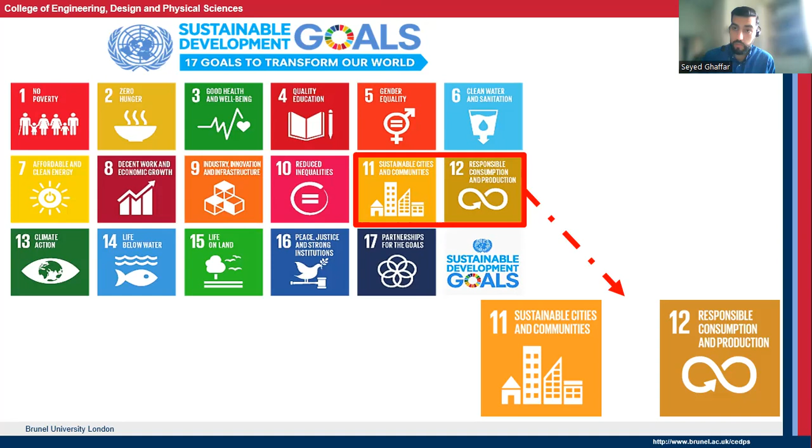These waste materials are produced every year throughout the world. Once the grain is harvested for food production, the rest of the straw stem gets incinerated or burnt on the fields, and this contributes a lot to the CO2 emissions, which is a negative impact on the environment. What we have proposed with this project, we wanted to make a sustainable, high-performing building material instead of burning them or sending these agricultural waste to landfill. So that's exactly in line with sustainable cities and communities and responsible consumption and production of our resources.

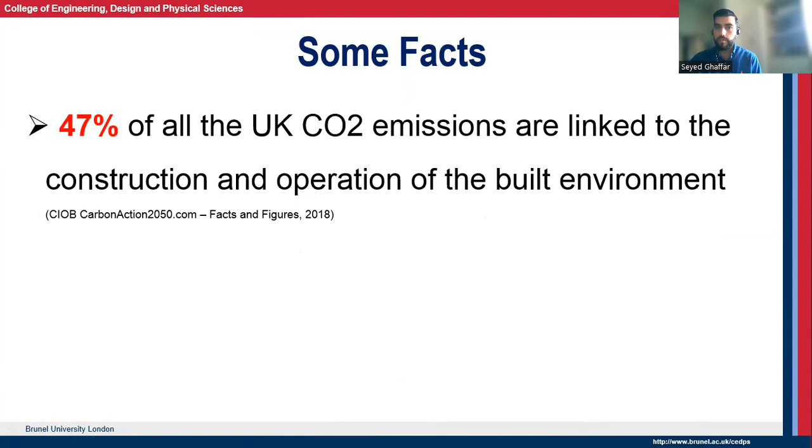I would like to also give you some facts about the construction sector. 47% of all the UK CO2 emissions are linked to construction and operation of the built environment. So this is a huge number, and this is only specific to the United Kingdom, but these figures are more or less similar in all the other big countries around the world, and in some cases they are even higher.

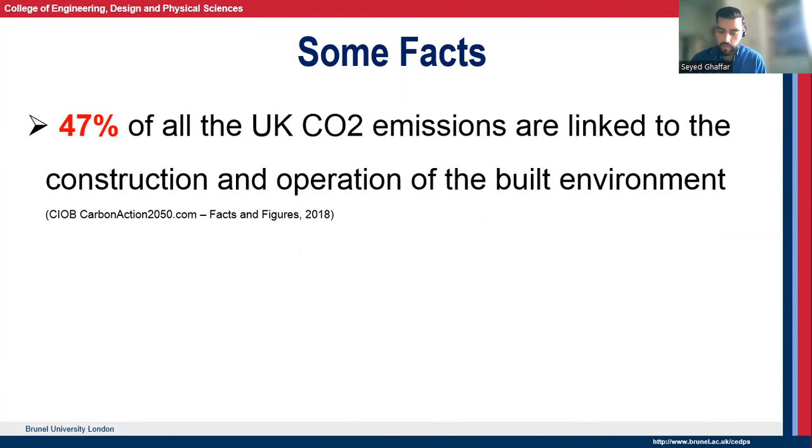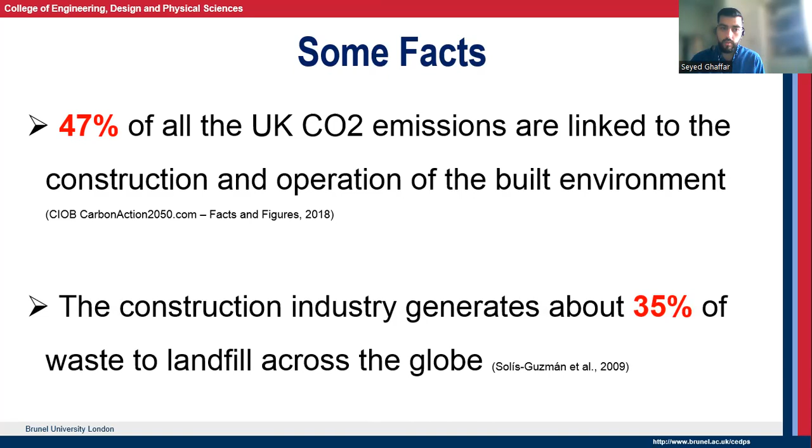Moreover, the construction industry generates about 35% of waste to landfill across the globe. This figure is for 2009, so it's really outdated, but this just gives you some of the motivations that we have had in order to think about this project and try to divert some of this landfill waste and give it some value in order to be able to produce building products using agricultural waste.

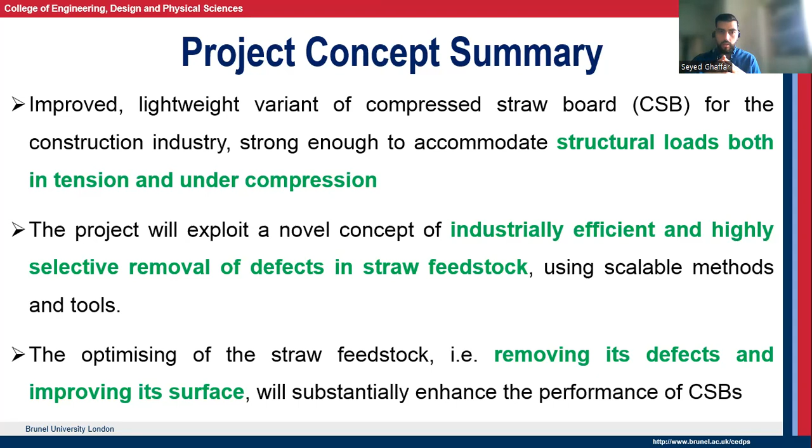And if we focus on these two important points, removing the defects and improving the surface chemistry, we will be able to improve the mechanical performance of compressed straw board, as well as the physical performance, durability, water absorption, and other durability factors, the moisture content and all of that, which are extremely important when it comes to introducing a product to the market.

So this represents the concept diagram of the project, HPCSB, High Performance Compressed Straw Board. It starts from here, so we wanted to focus on modular systems. These compressed straw boards come in a modular form and they just get assembled on site to have a low-rise building, a farmhouse, and other similar projects. We had a partner called SpaceLink Trust. They were giving us these foundations and these wall elements that we could use in order to fit our CSBs.

Main focus was on raw material optimization, defect separation. So you are looking at the raw materials here in this picture, and we wanted to remove all the defects that we find in this straw, wheat straw specifically. And another work package was to integrate the compressed straw board into the SpaceLink system.

We had to focus on the pre-treatment of the material in order to enhance their properties. We wanted to come up with an environmentally friendly manufacturing methodology. So we didn't want to use high energy intensive pre-treatments or chemical agents to optimize and improve the raw materials. We wanted to just use a very mild combination of physical treatments to improve the surface chemistry.

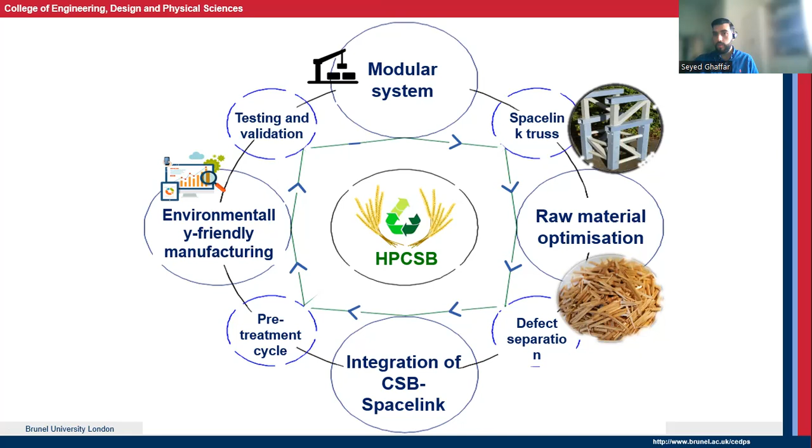And most of the project, of course, in these type of product development projects is about testing and validation of the hypothesis, of the results, and ensuring that they are up to a certain standard to be able to be used in the built environment sector. So it starts all from the coordination and communication. We had two project partners, including myself as a principal investigator.

The project was defined using 4 different work packages, starting from work package 1, raw material characterization and pretreatment, feeding that information into selective processing for optimization of the raw materials, then moving on to the manufacturing process for the development of prototypes. Work package 4 was all about testing, characterization, and impact evaluation. So in terms of the life cycle analysis and life cycle cost, in order to be able to industrially upscale and write an appraisal for upscaling of this process and this project.

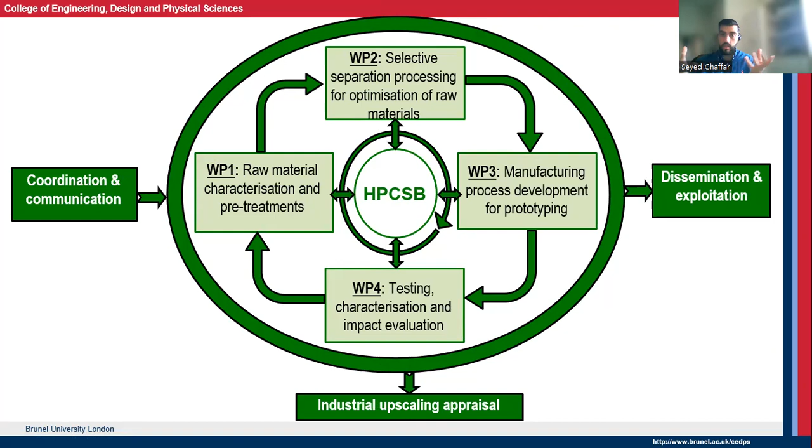So this is the picture showing the raw materials of the straw. This is the anatomy of the wheat straw stem. So these are the grains. Then you have internodes, then you have nodes, which basically act as joints of these columns, let's say, of these internodes, and so on and so forth. So we have these nodes as defects because they are not good in tension. And I will show you their morphology in the next slide. So this was the raw materials that we were dealing with.

And of course, on the surface, we had a lot of wax, a lot of silica, which makes the surface hydrophobic and does not allow any resin to penetrate inside the surface and improve the bonding performance of these raw materials. So we had to remove this silica and these waxes on the surface of straw using an eco-friendly pretreatment.

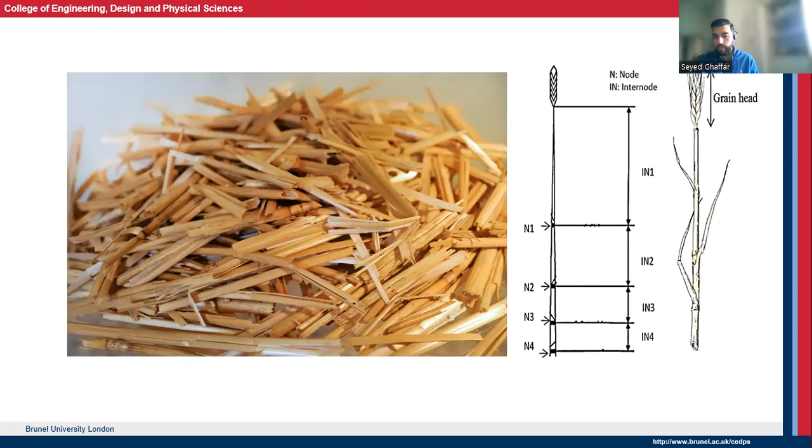So this is the microstructure of the node in the wheat straw as it is cut longitudinally. And you can see how the cross-section looks when you go from the bottom, from the root to the grain head. So you have the cross section at this part, and you can see it changes, it becomes very compact, and then it enters the upper internode. These are some more optical microscopy and scanning electron microscopy images of the node.

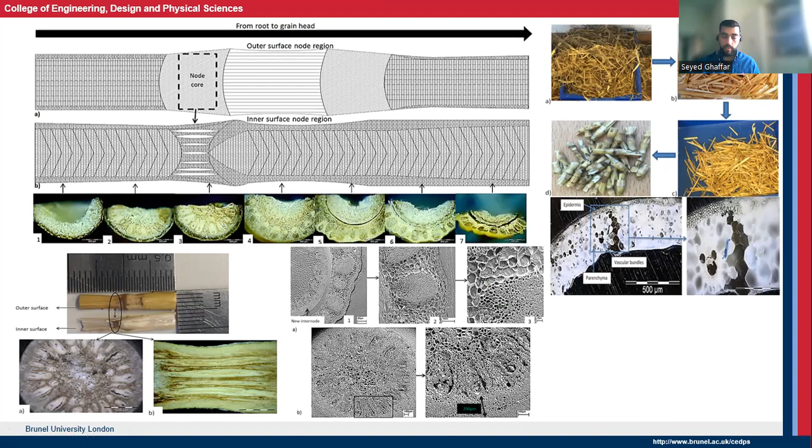So in order to have the valorization pathways, biorefinery, we had to identify which part of the straw is good for which application. So the internode, we focused on pulp production for paper, and then you can make biocomposite out of internode if you compress them together. You can make energy pellets for incineration, anaerobic digestion for the production of biogas. You can then use enzymatic hydrolysis for the production of bioethanol and production of bioplastics.

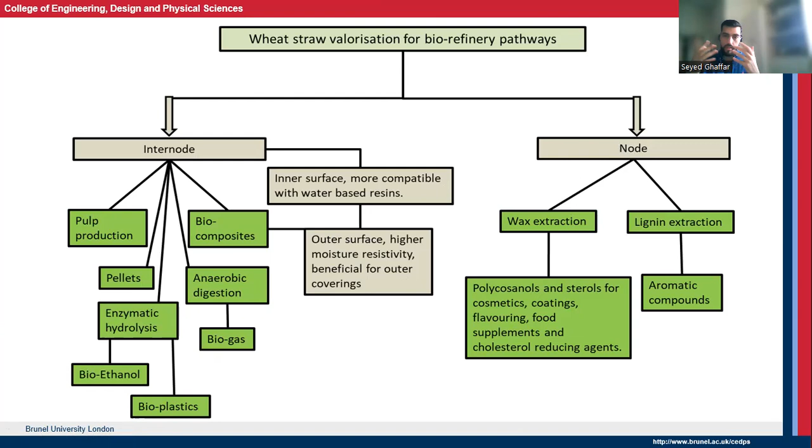But for the node, because it has high content of wax and lignin, you can extract the wax and lignin for aromatic compounds, and wax can be used for coatings, flavorings, food supplements, cholesterol reducing agents, and cosmetic purposes. So each part of the wheat straw can have its own valorization or biorefinery pathway.

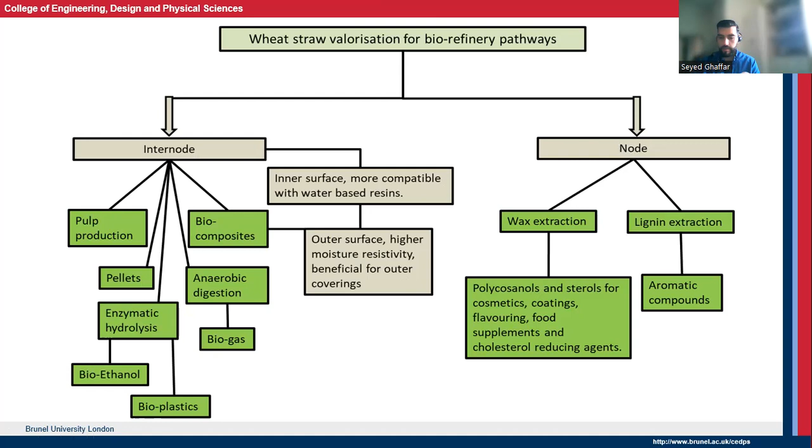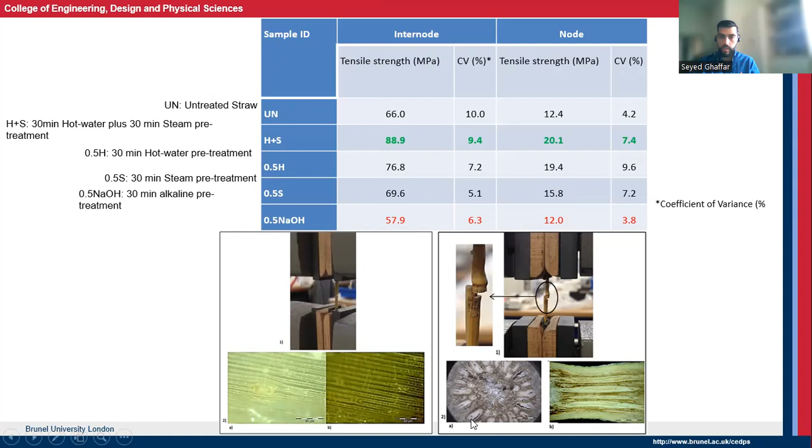And I studied the separate effects of hot water washing for half an hour on the tensile strength and the steam. And you can see most of the contribution to the high tensile strength is coming from the hot water treatment of 0.5 hours. When you look at the microstructure of the internode in tension, you can see that they have these long microfibrils that are very strong in tension, whereas the node is not very good in tension because its microstructure is completely different to that of internode.

Then we looked at the comparison of different bonding scenarios: inner to inner surface of the wheat straw, inner to outer surface, outer to outer, and inner to inner, inner to outer and outer to outer for the untreated straw. And you can see that the best performance comes from the inner to inner connection of the hot water followed by steam pretreatment of the internode, around 5 MPa of single joint lap shear in tension.

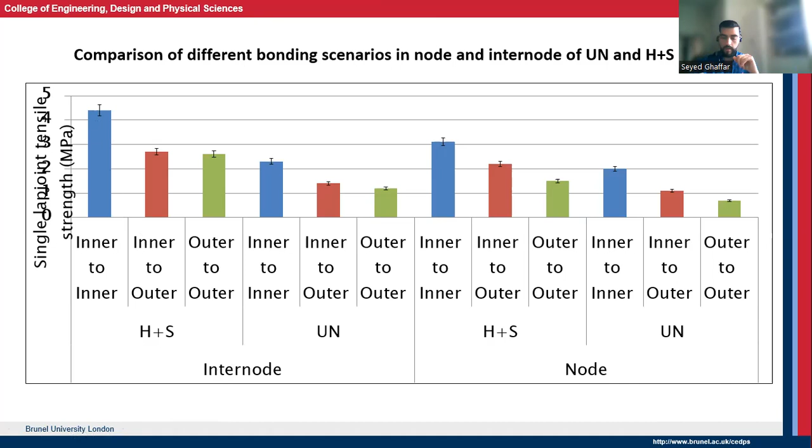So this is the microstructure study of what happens when individual straw internodes are connected to each other and then pulled apart. In the case of untreated straw, as soon as we have some tension, we have some nucleation of microcracks, which then translates to delamination at the interface, separation and very low strength. Whereas when we have hot water followed by steam pretreatment, we have a very strongly bonded interface.

Another important point about the steam treatment is the expansion of parenchyma, or let's say the microstructure of the straw, which allows deeper penetration of the resin into the system, therefore making it stiffer and stronger, and contributing to a higher performing compressed straw board.

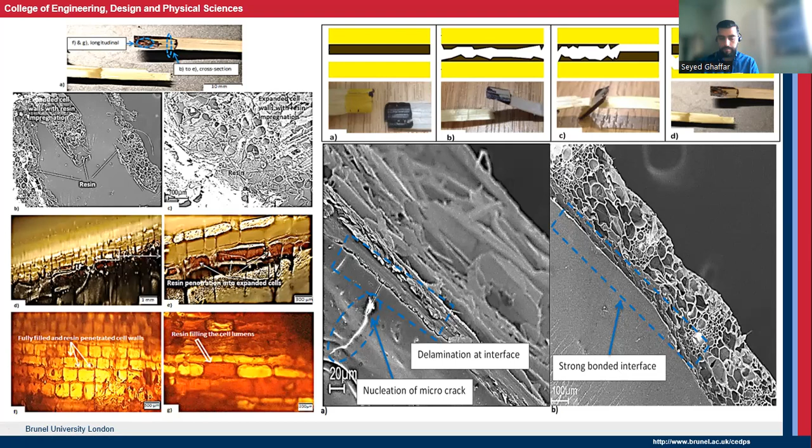So as I showed you, we have internode and node. Each of these anatomical sections of the wheat straw has specific chemical characteristics, physical characteristics, and mechanical properties. So when we are thinking about a biorefinery, we have to be specific and, according to these characteristics, define an application for these parts. And we found during our study since 2013 that for biocomposite production it is best to use only the internodes and not nodes, because they are a defect, especially with their very weak tensile strength.

So if you are more interested in this topic or in the development of these bio-based building products that are extremely useful for the built environment, you can read all of these related publications, and hopefully you will find it interesting. Essentially, we wanted to valorize an agricultural waste that every year the farmers burned, contributing to CO2 emissions in the built environment and the whole globe. And we are now finding ways to use it in the construction industry, in a built environment for low-rise buildings, farmhouses, and so on.